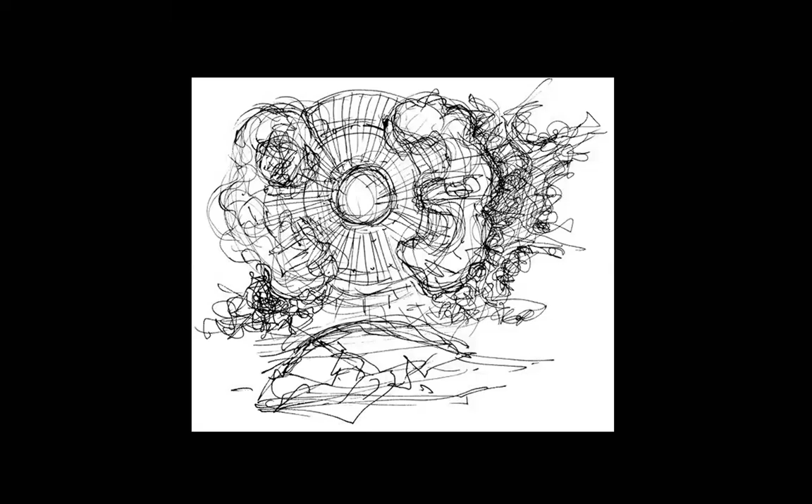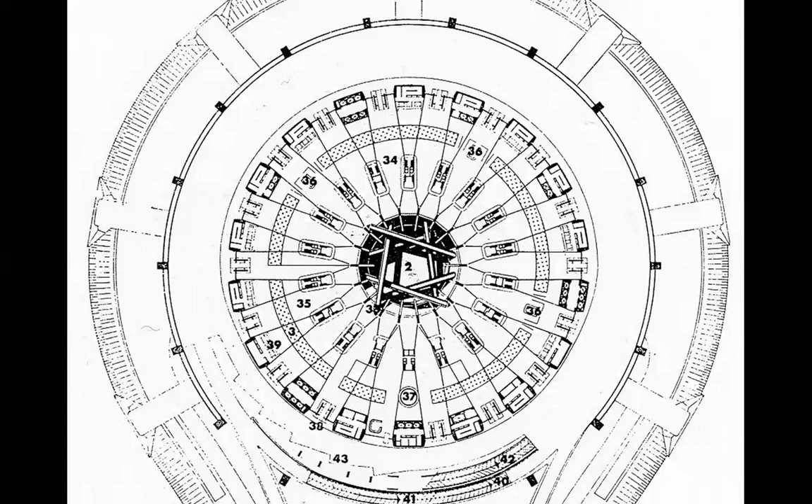At least this is one of them. This is less visionary. This is actually a plan. I think it's the airport Charles de Gaulle in Paris, one of his earlier works, but an excellent work. And if you go to Paris and if you land in Charles de Gaulle, you'll be right there in the work of Paul Andreu.

And anyway, now we start with this, what is strange in a way. Wait a minute, I'm a little bit confused, because this presentation has something unique, and I almost apologize. I probably have to apologize. I start with his latest work. That's how I built the PowerPoint presentation. I moved backwards, not forwards. I don't know exactly why I did so.

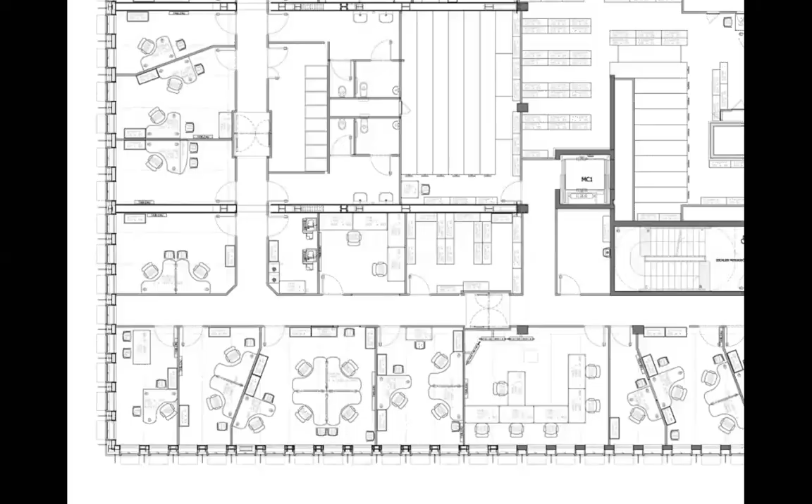But he was, I think, an excellent organizer. To do an airport properly, you do have to be an excellent organizer. And by the way, he was the consultant for Renzo Piano in Japan, for the airport that Renzo Piano built there. So, of course, he had a lot of experience. You have to handle very well circulations and many other complex functions. He was probably very good at it.

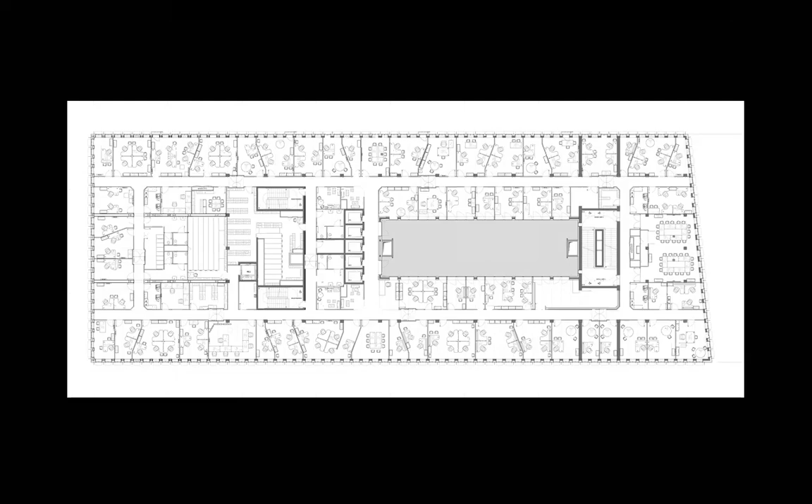You are surprised, and I am surprised that the same man also wrote fiction. Maybe he also wrote poetry, and he also painted. Bravo to him. I think we need such people with various interests, equally intense in all of them, not just scratching the surface of some other domains, but being present in them, so to speak, like a true Renaissance person.

Inside the building is though more interesting than the outside, I think. It's symmetrical, yes, it is civilized, but it is supposed to be civilized because it's a governmental building. But it has character and it has honesty, and I think it's okay. Maybe it's not a masterpiece, but it's not a work to be necessarily timid about or ashamed of.

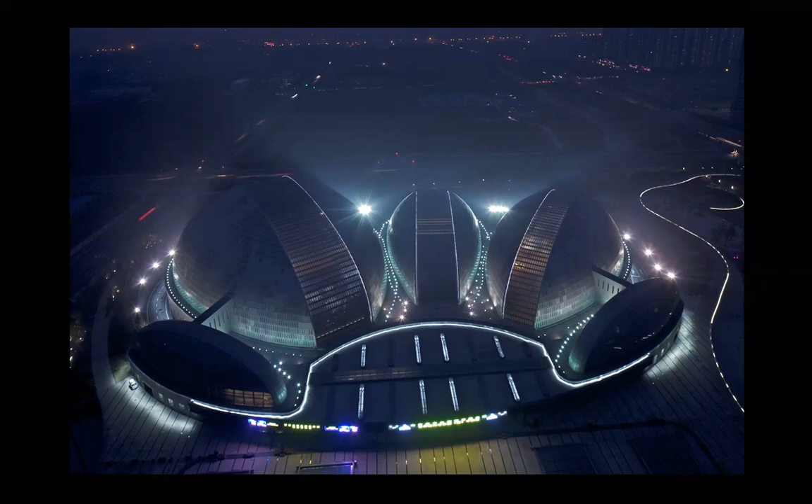Of course, such buildings are being built and were built in the last years in China. He had immense success in China. He was even given a teaching position at a very high level in architecture, and he was flooded with commissions. And he was very grateful to China that it had confidence in him.

Now, many architects built in China, and it was their luck that China opened up, at least to some signature pieces by signature architects. And I actually think - I mean, it was China's way to accelerate its coming into modernity, I guess. But the richest part of China is actually their villages. And there are thousands of villages that have been abandoned. And there is immense potential there, not in the big cities, but in their villages.

I have a book from the 1920s published by the Germans, a beautiful book about old China. I saw unbelievable beauty in otherwise impoverished villages, but extremely interesting, picturesque, romantic, and spiritual even, with pagodas scattered over the hills. Very, very beautiful. There is an immense potential.

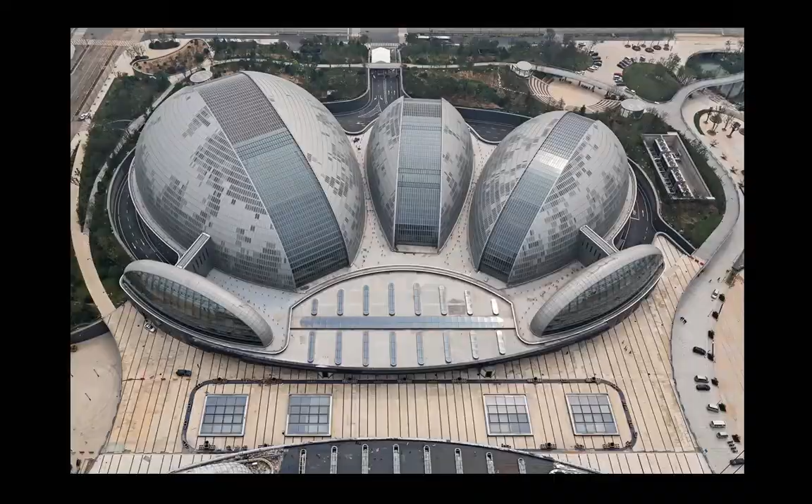Well, again, we have seen buildings kind of similar to this one. Even Renzo Piano built a music center in Rome, not very dissimilar to this one to an extent. So I guess he was not excessively original, but as Mies would have said and did say, the idea is not to do necessarily an original building, but to do a good building. And I think his buildings...

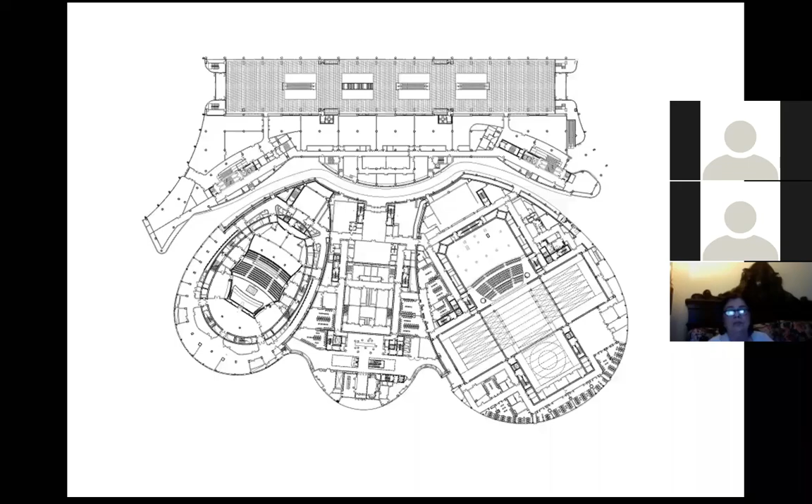function well because, trained as he was with airports, I think he was able to handle complex matters quite well. And the interior is impressive - apparently simple or almost simplistic, but there is a well controlled monumentality and even a sense of scale. I think it's a good interior, and he was quite able to handle huge spaces, like a man who built 25 airports.

At first sight, even the performance rooms themselves seem to be fine. So there are various spaces, because there are several buildings there. So these are quite ample programs.

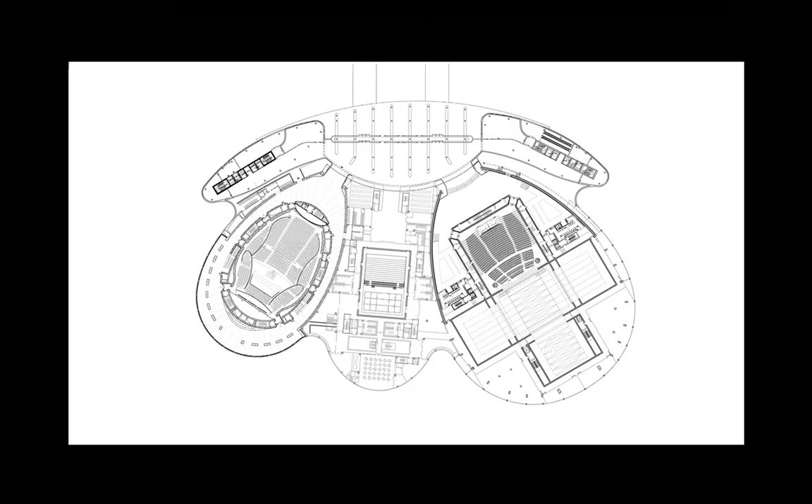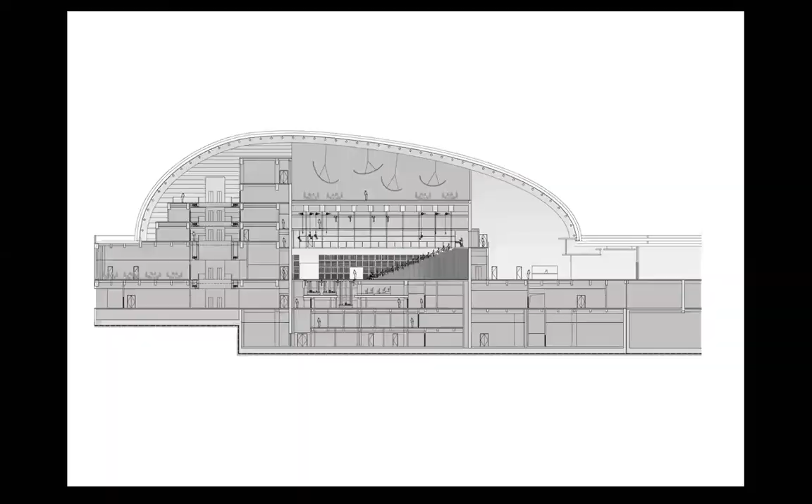This is the plan of the 3 buildings of the complex, and a section. So I guess if you know how to handle this carcass, you can make the building almost regardless, and then you cover it with this carcass, which is doing the job. But it helped him that he was also a civil engineer.

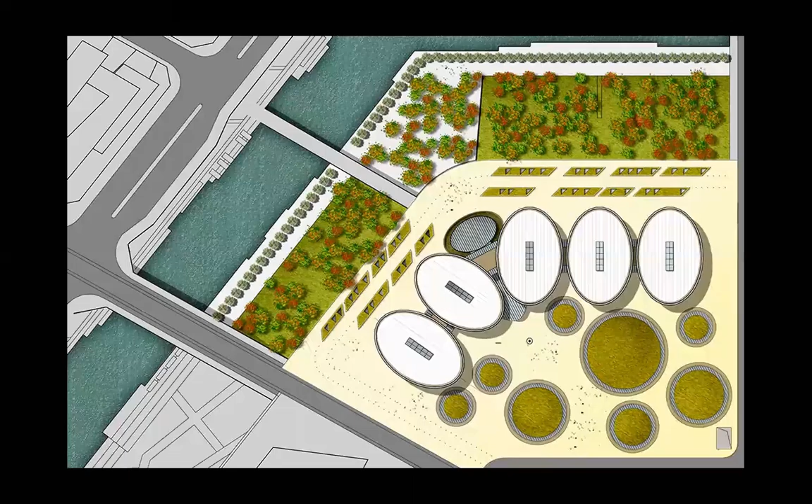Okay, the archaeological museum in Taiwan from 2010, not very dissimilar compared to the previous work, although the image of the building or pavilions is a little bit different - maybe a little bit pop, but discreetly so. I would rather say that it's more about some kind of archetypal architecture, and he does seem to have an interest in architectonic archetypes.

He also has a side which you could call a little bit so-called commercial or predictable, but maybe it's unavoidable when you handle such large programs, and when your experience was with building 25 airports and designing around 60, if I remember correctly.

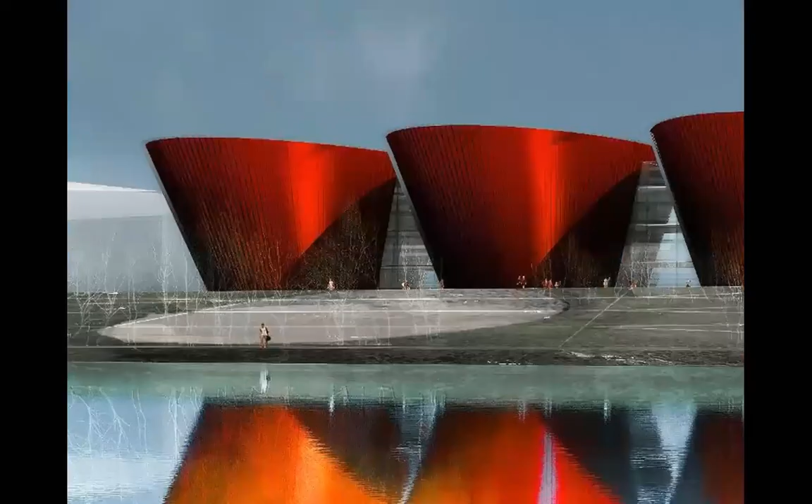Here you also have the dialectics between the green of the grass and the redness of the pavilions. And it's always good, even if you allow me a suggestion - I am a terrible cook, but if you cook and think about colors of whatever you're putting on the plate, it does matter. Because if you combine green with red or other colors, it could become very appetizing, also because of the chromatics of the dish. I experienced this and I think it is true. But here it's about something else.

Now, a complex of casinos, hotel, commerce, bureaus, offices, and housing in Macau from 2005. Here it was not very clear to me.

I couldn't find a lot of pictures, but that silhouette there is interesting. I'm not sure what is going on there, and I don't have other pictures, I apologize.

Now we have, from 2000 to 2004, a hotel for the Oriental Arts Center in Shanghai, and there are other things, so it's a hybrid program, 200 rooms and a center for affairs, a business center.

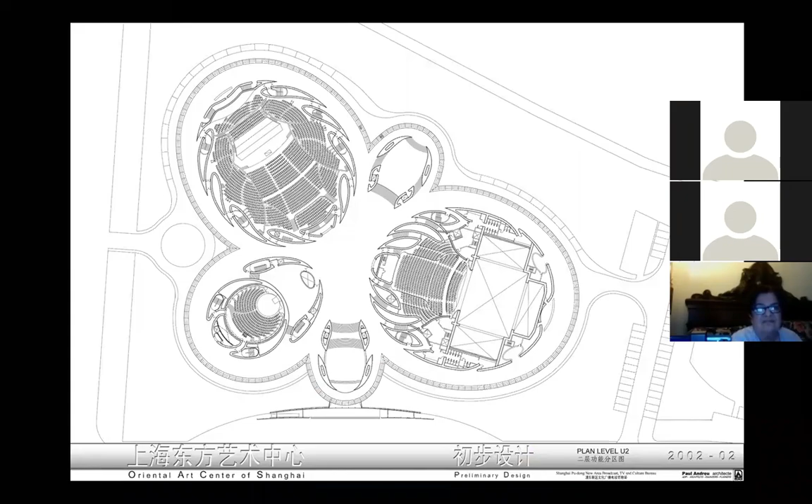I don't know, I mean, Mad Architects did something probably a little more interesting, in a similar way, but more spectacular. The section is not flamboyant - it's in fact rather modest, at least in this part of the building.

And now we arrive at an administrative center, again in China. So as I said, this gentleman opened his office at 63.

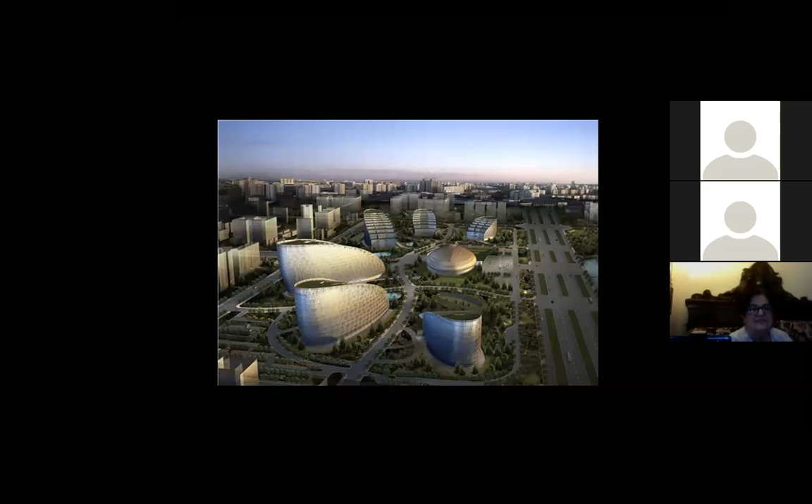I don't think too many architects did something like this. It's remarkable that at this age, he changed his life dramatically. Until then, as I said, he worked for a large corporation, a French one that built a lot of airports.

And now we arrive at the airport in - no, unfortunately I couldn't find pictures with this one, but don't worry, you will see a lot of airports. Then another - no, this is, yes, it is the Center for Oriental Arts in Shanghai. Sorry, this is the same building that we just saw.

And now we arrive at his most important building, as it is considered: the Grand Theatre, the National Performing Arts Center in Beijing. So, National Center for the Performing Arts, or Opera de Peking - Beijing is also known as Peking. From 1997 to 2007, or 1999 to 2007.

So for 8 years he labored at this building, and together with him, an army of people. But they built an immense jewel. It's not seen in this picture as dramatically as it is capable of, but you will begin to see that we are dealing here with the most important building in the field of performing arts in China.

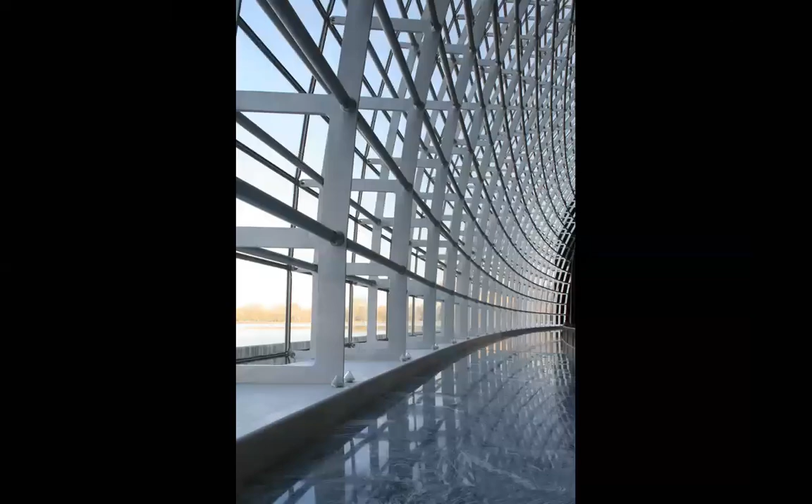Anyway, but this is not the case here. You see how the building was built. He's not hiding anything, and the aesthetical values of the structure are obvious and relevant. He also plays in an ornamental way, but at the scale of the building, and these are not little ornaments added to the walls.

He's an artist who understands architecture very well, I think. And the interiors are, how to describe them? Maybe decent, but that's not a very appreciable word. Maybe more than that. They are good. I think they are good.

A little bit predictable for those who want strong stimulants or provocative statements. But you see his honesty. This is an honest builder, an honest architect, artist and engineer who brings together his knowledge about various fields and does so without a need to impress necessarily, although the scale of the building is in itself impressive, to say the least.

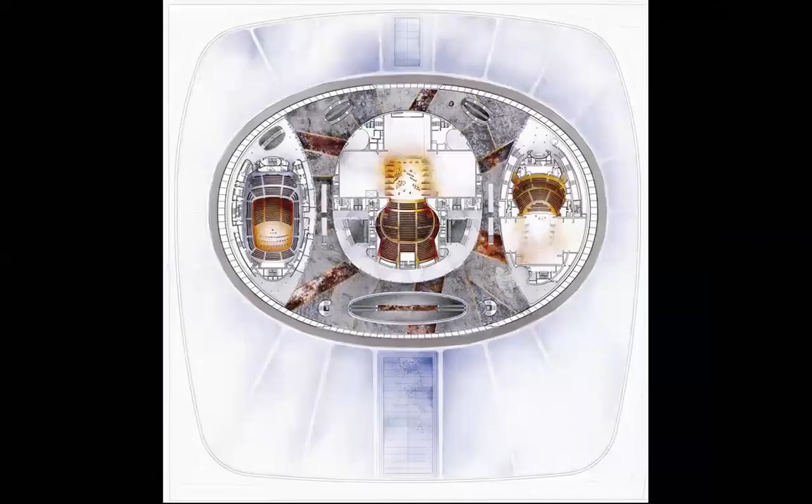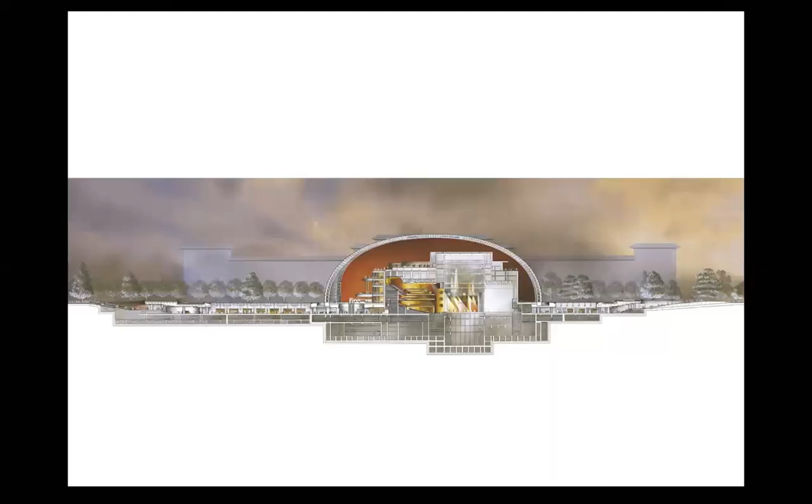This was done, and maybe it could be used, this system of representing architecture, in a legitimate way, because it's logical and it's clear. Yes, you have to rotate the print in a way, but even this image is kind of interesting. It's a functional diagram. It shows the plans, but it has some mystery and some sensitivity. I mean, this I would hang on the wall as a graphic work, with graphic values, artistic values beyond the description, the section.

But he uses the same method. He builds the architectonic functional organism, and then he covers it with this cupola or carcass that is, most of the time, round. Some would say, well, it seems a little bit too simple or simplistic, but I don't know, because there are images of this building that are very impressive.

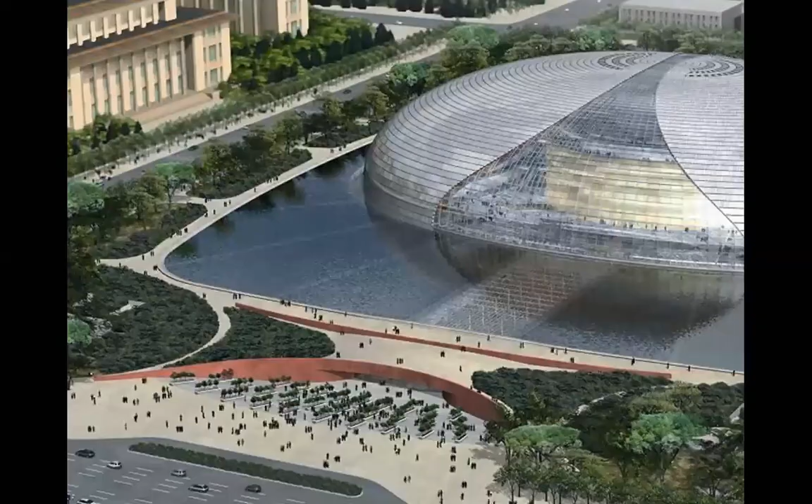And they do represent the prowess of technology today. I'm not so sure about this entrance, but maybe, when you enter, you actually do not see the splendor of the building. It's a little bit hidden. Maybe that's the correct strategy. It's just that this entrance at the bottom, we saw the first picture, seems to be a little, I don't know, not inviting enough for my taste.

But on the other hand, I think it's a good strategy to not betray, to not reveal everything from the beginning. So you offer the surprise once you pass through this threshold, through this entrance, then you will have the discovery of what this building is.

Also, I noticed something now, since I've been doing these PowerPoint presentations, and some of them are about China. The Chinese seem to be very fond of having water in close proximity of buildings. In fact, many of their important buildings are built on water, and this is something worth thinking about. I don't think too many countries do this, and I think the closeness between building and water is an inspiring one.

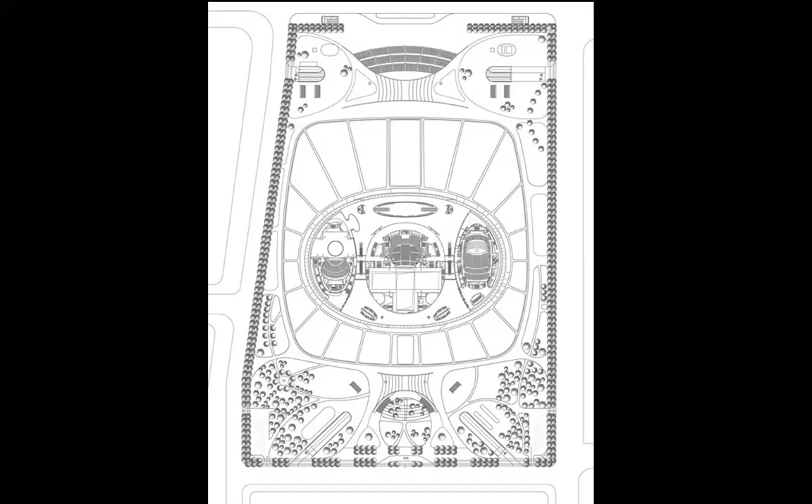And this is the plan, with a little bit of its ambience, or the environment. The section is not so good. We look again at an image. Then this one changes—it's covered with titanium. I don't know exactly how they do it.

I saw pictures, and you will see one too, which is totally blue, and we see it in this way. So I guess this mysterious unidentified flying object could have some chameleonic qualities.

Now we see a gymnasium from 1998 to 2001, also done after he opened his own office. Here he tried to mimic a little bit the hills in the proximity of this city, as you kind of see here.

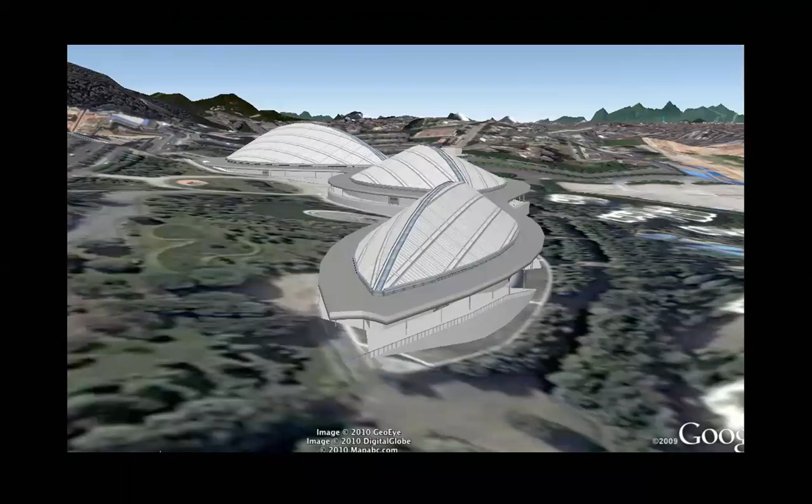And here again, the structure is impressive and honestly externalized, as you can see here. But he doesn't have the flamboyance of Calatrava, and this is something I like. Yes, he is using structure at a large scale, and it is exposed, but without that expressionism technique, as it was called, of Santiago Calatrava.

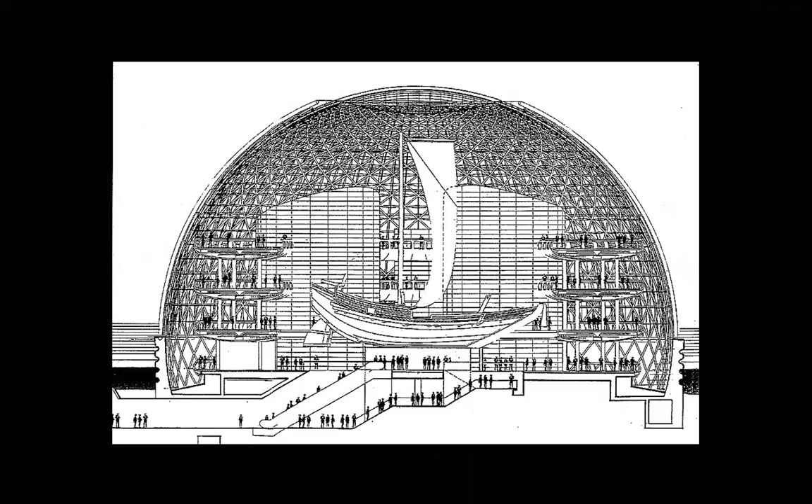Now we see something built in Japan by him, the Osaka Maritime Museum, 1998 to 2000s. Yeah, well, the same kind of architecture. Sorry, I don't know why people didn't focus better, but you see it here in a better way.

So yeah, he deserved the luck, but he also had the luck of big commissions coming from various countries. And this is an encouragement for anyone who wants to have a full life and earn one's living: it is possible through passion, through hard work, through seriousness, through sensitivity. If you dedicate your life to architecture in this sense, sooner or later, I think some good results would happen. But it is important also to have the desire, to want more.

And I think the last image of this presentation is with a quotation from him, or a quotation of someone about him, that he always wanted to discover something new.

This is something true about any great artist, architect, writer, poet or engineer - you name them. There is this curiosity, this continuous desire to explore something new. That is the child within who asks questions and wants something else. In other words, they do not like the dogmatic way of life. They hate dogmas, they want creativity, and nature is a great lesson of every year rejuvenating itself. I think we should do the same thing, or try to, to rejuvenate ourselves.

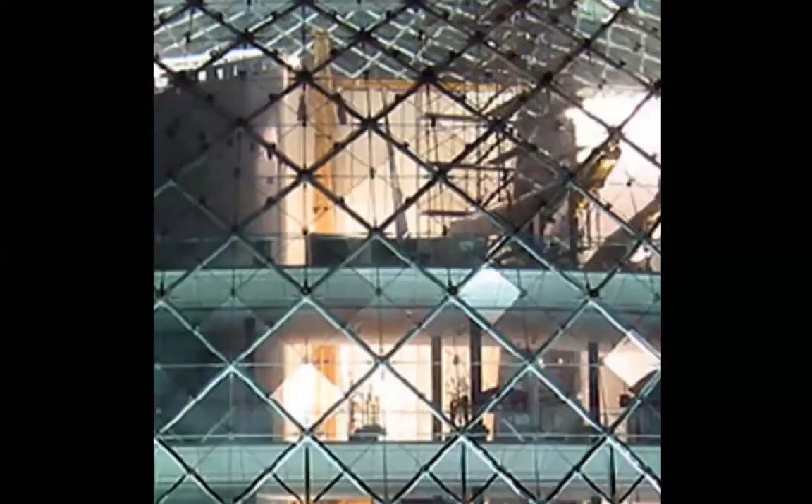Paul Andreu again. Again, an unfocused picture, but that's how I found it. It seems this cupola was actually not built on place, but was brought - at least parts of it - a major important part, and was descended from the sky, so to speak, onto the building. How else am I to interpret this picture? But this is a very large object, if I can call it so, probably inappropriately.

Now we arrive at his other masterpiece, which was an earlier one. As I said, this presentation started with his latest buildings and moves towards his beginnings. He built 3 airports, or 3 terminals, at Charles de Gaulle Airport. This is the earliest, from 1967. No, it's not the earliest, sorry. Or is it? I think it's the earliest, but they continued to work and add, so the work there actually lasted until the 2000s and something, and they will continue to work.

But what he did from 1967 to 1974 is very interesting. From afar - if you arrive in Paris by plane, Paris is served by a few airports, but it might be that you land here. From the outside maybe it's not so impressive, but inside is very interesting, and we'll see pictures of it.

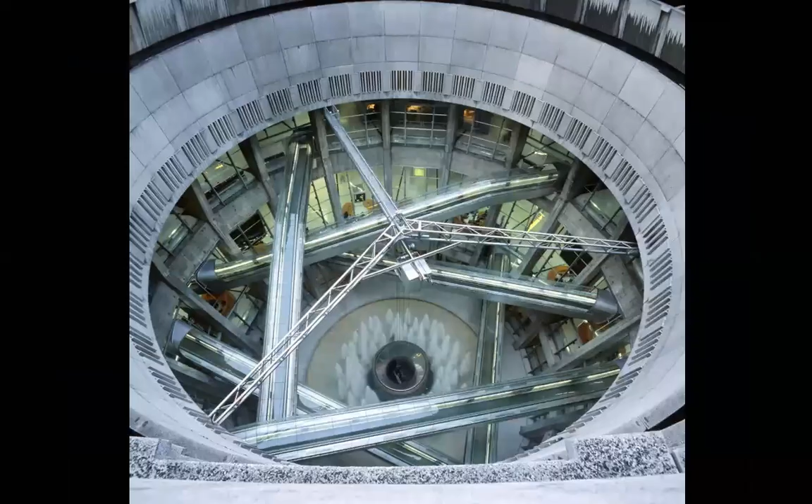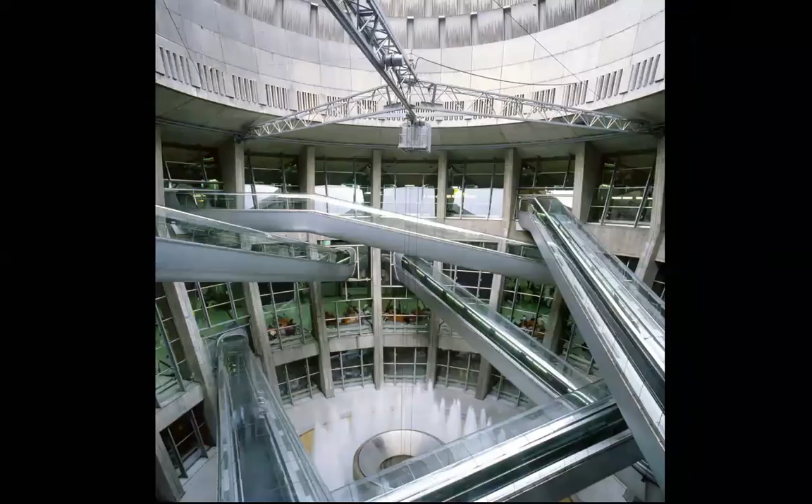It's interesting that in those years he played with his connections, these bridges, so freely, you would say he was almost a deconstructivist to do something like this. Well, he did it 50 years earlier - a courageous manipulation of functions and spaces for any time.

Here he had a problem. A portion of the airport collapsed, and apparently he was not accused, but there was a big turmoil. Apparently he said that the building was not quite built respecting the specifications of the project, and so on.

An airport is - I don't know now with the pandemic, and of course the pandemic is changing many things, people will travel less, at least for the time being. But at that time, when he started in the 60s, it was a new thing. A lot of airports came into being, so it was a high time for building airports, and he was lucky to work exactly in that field. He didn't regret it, because the rewards were sometimes astonishing in various ways, especially when you were allowed to be as creative as he was.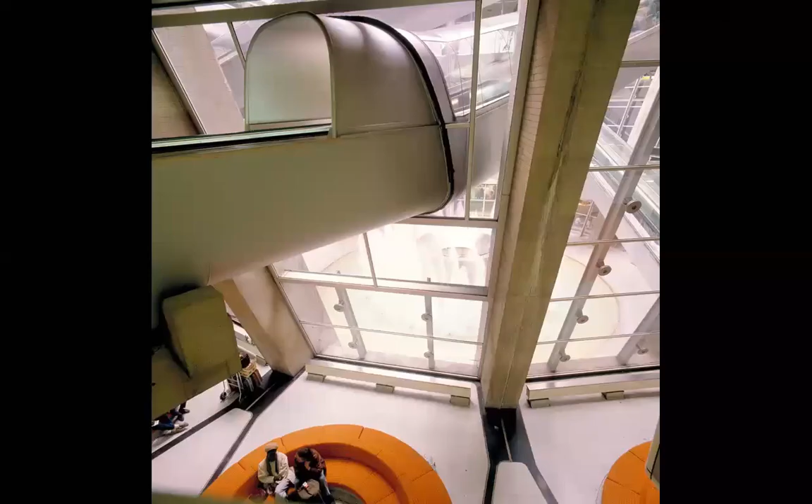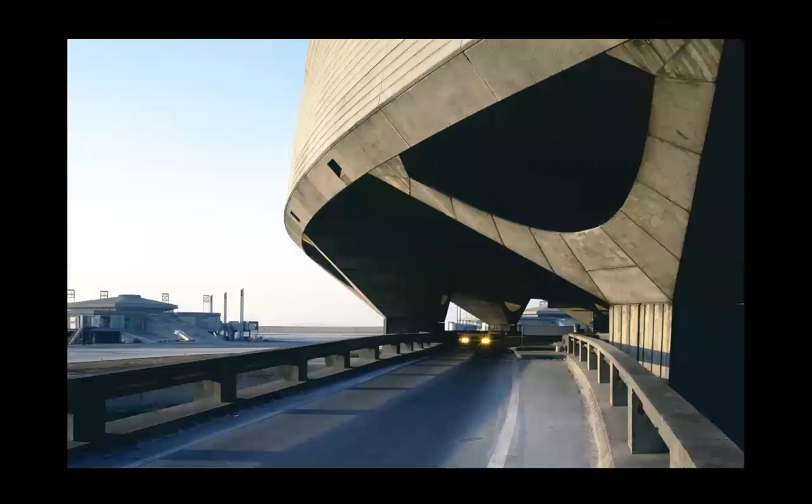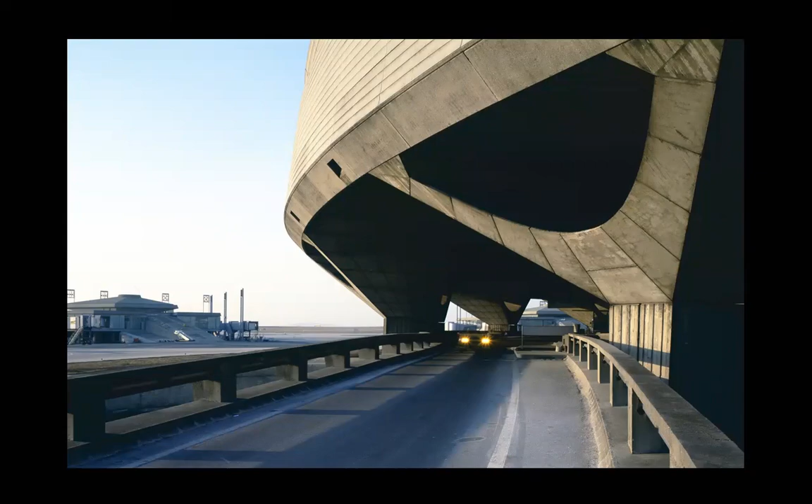Again, we are talking about the major airport in Paris - a prestigious location. Even outside, when looked at from the highway, you can tell this is someone who understands sculpture, the sculptural side of architecture.

But we are still in Paris for the moment. This is Terminal 2, modules A and B. They have many so-called modules and terminals, maybe not just like in New York, but still it's a big airport. Again we see that with structure he does a lot, because structure is not linear - it has a movement. Maybe in such programs it is enough, you don't need to add ornaments, because there is a certain ornamental sensitivity because of these curves that mysteriously recede, yet very logically at the same time.

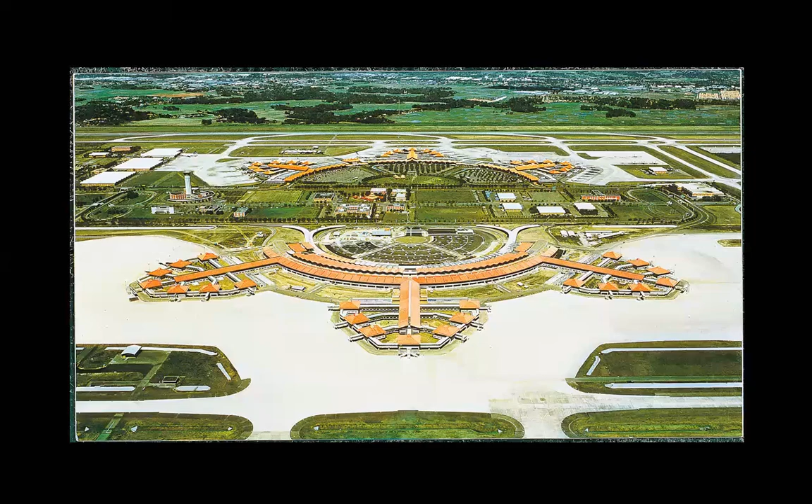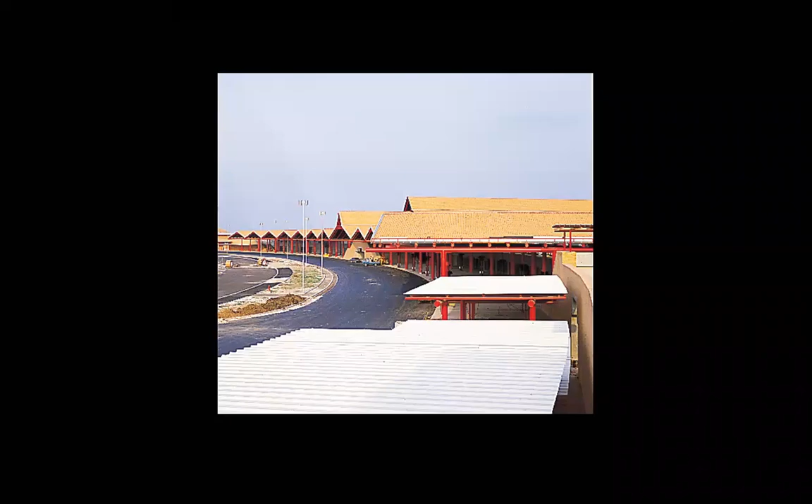So it was a work from 45 years ago. And this is just the plan - no, maybe not, but it looks kind of interesting. It almost looks like this is the project, but it might be that it's actually a picture of it. Anyway, I love the fact that the architectural language is very different here - more modest, almost traditional, but not a pastiche, not mimicking. I feel he did, or they did, a good job here. What do you think, Florian and Daliana?

I totally agree. You see, like what you see right now in the background here, this specific roof is a traditional roof type. Which one exactly I can't tell, but maybe Daliana can. It's called Joglo roof from Java.

What I find interesting is, although it's a relatively big airport, it has these low-pitched roofs, which is, I would say, traditional Indonesian architecture to shade the sun away. So you don't have these roofs very high up, but more on a human scale. Even though it's a big airport, it is not so imposing.

It's not so huge that you have this massive central hall element. It's sort of linear pitched roofs, and then it branches out like a tree into smaller joglo pavilions where you then step into the airplane. First of all, it works quite well, and second, it gives surprisingly a human scale to an airport.

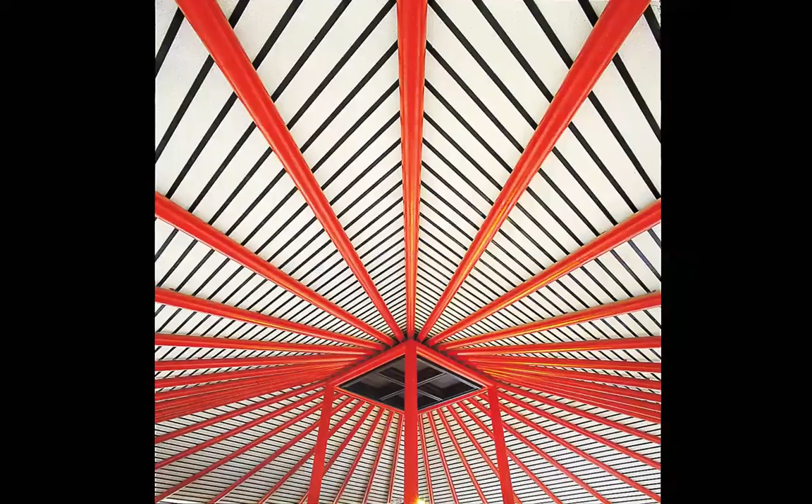I think they did a good job, and there are even so-called details which are convincing. If we look at this, even here, I see some kind of discrete and modern reference to the local culture. And in such a noble and simple way, if we compare with what he did with the melodramas of Michael Graves.

Here is an architect who understood that there is no room for melodramas and for postmodernism. Yes, there is a respect for the local culture, but I think very subtly he makes a reference to the local culture without mimicking anything and without becoming ideologically charged, or I don't know how.

I like this work. About the ideology, I'm not entirely sure if I can 100% agree, because Indonesia, like a lot of other countries who got their independence, it is important for the nation building to also have their own icons and own representation of what makes an Indonesian culture.

And I would see this as a political project as well as what happened in France under Charles—sorry, what's the former president? I forgot the name, doesn't matter. But it is nation building, so this airport is a very important showpiece to the world of what Indonesia stands for.

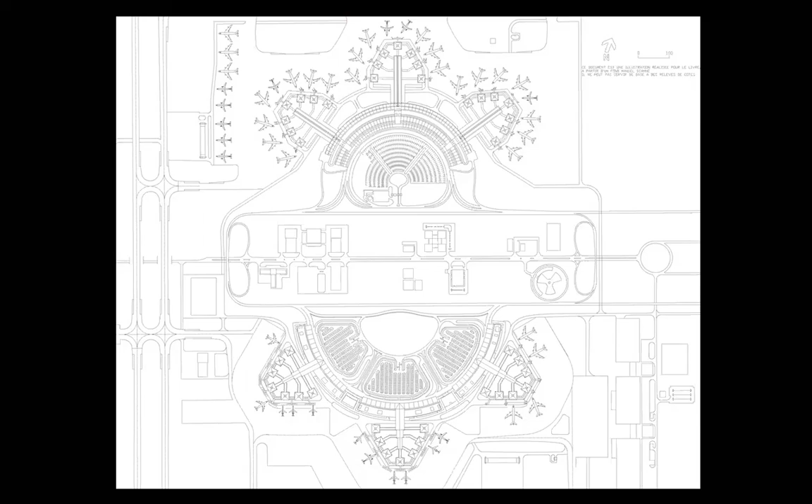Okay, no, it's interesting, and we can talk about this later also, because anyway, it was an interesting dialogue, and I will reflect on what both of you said. Okay, so we move forward.

Anyway, we'll move forward. So, born in Bordeaux, France, Parisian architect Paul Andreu had a great desire to do things with his hands and with his head, and to always keep discovering something new. This is the last slide of this presentation, and we wish him happy birthday, and I hope maybe in the future we'll discover new things about him.